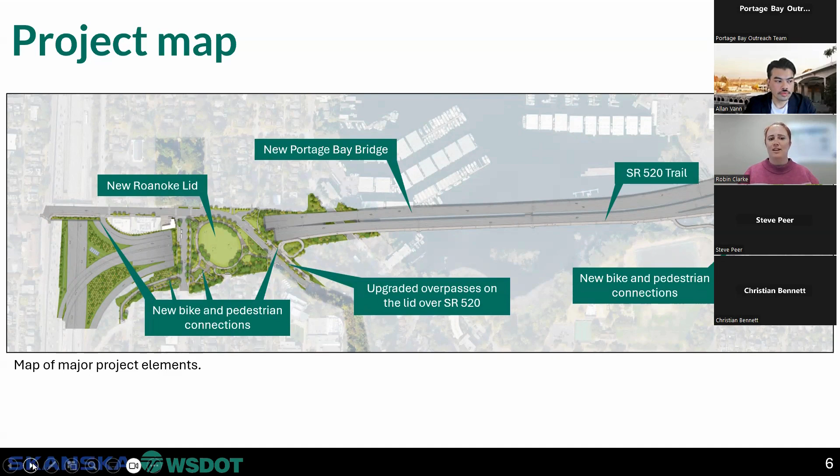So as you can see right here, we've got a little bit of a new graphic just updated for you guys to check out. This is our project map for the Roanoke Lid and the new Portage Bay bridges that will be replacing the existing 520 bridge across the bay. On the south side, we've got our SR 520 trail that's going to connect the Lid to the East Montlake side of the Portage Bay, with new bike and pedestrian connections to the Bill Dawson Trail and some of the local areas on the Roanoke neighborhood side of the project.

In our project schedule, we are still early into the spring of 2025.

Happy solstice, everybody. Earth solstice. Is it solstice or... I don't think it's solstice. It's the first day of spring. Happy first day of spring to everybody. Thank you, Chelsea, I'll get my terms right for the next one, which is summer solstice. Spring equinox is today, thank you again.

We're in the early stages of construction for both our work bridge and getting to our Portage Bay Bridge North overall construction, which will go through 2027. Just like to point out at the bottom that we're getting towards the end of our in-water pile driving season, the first of 5 major seasons we'll be tackling throughout this construction schedule. We'll talk more on those updates in a moment.

Getting into some of our current construction activities, for this month we've been continuing our impact pile driving in Portage Bay. Most of our work has been during daytime hours, including Saturdays and Sundays throughout the week. We've also been removing some select trees and vegetation over near the Bill Dawson Trail and Montlake Boulevard area.

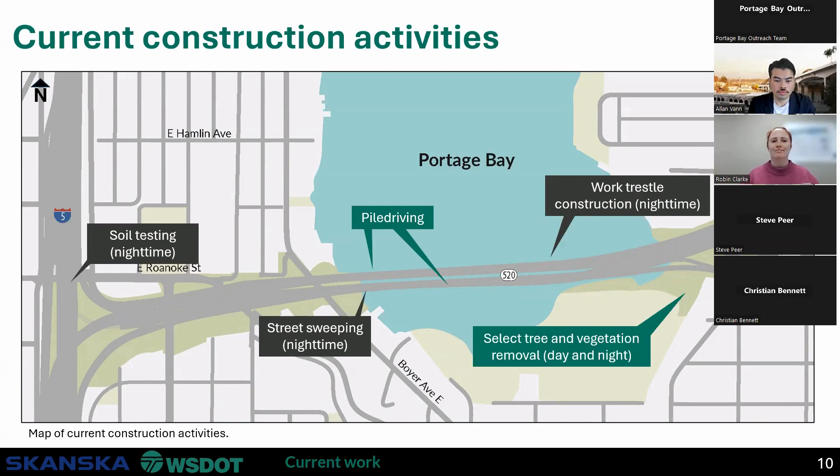And we've had some select tree and vegetation removal for day and night over on the east side.

Getting into a little bit more depth on the pile driving progress for this month, we are again installing our daily goal of between 2 and 8 piles each day. For those of you in and around the area, we have, I think, 4 cranes out there directly working on the work trestle itself.

And we have one working on a similar project adjacent to the work trestle, working just on an extension project of the work trestle itself. The areas in green are part of that progress you guys see. We have, as of today, 171 piles installed for our overall goal of, I believe, 380 thereabouts for this season.

Generally speaking, between impact pile and vibratory pile, getting a little bit past the season, we have crews pile driving 7 days a week through the end of the month, and our impact window ends on April 30th. After April 30th, we'll continue with just vibratory driving.

Again, it ends on April 30th, so May 1st we will be doing strictly vibratory pile driving up until September of this year, this fall. Between May and September, we will still have cranes and barges out on the water working on those work trestles, and they'll be continuing the vibratory pile installation on both sides of SR 520, continuing installation of the temporary work trestle. But again, it'll still be with the vibration hammer to install those piles, so you won't hear any more of the pile driving impacts you're currently experiencing.

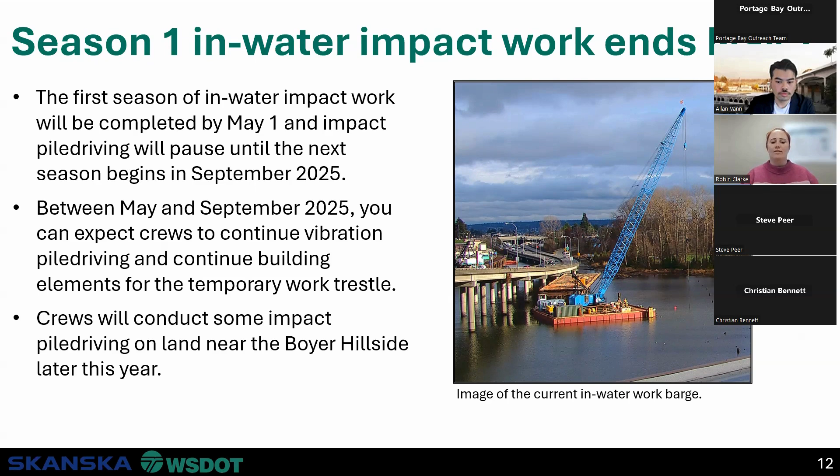Then as we get onto some of the land near Boyer Hillside, we'll resume a little bit of impact pile driving. I don't expect that until later this year, but we'll continue to update you guys as we know more with our schedule and operations.

Just a little bit on the difference between some impact and vibratory pile driving. With impact pile driving, you can see an example there on the right in the photo. It's basically a large hammer that hits the top of a steel pile, sending a very abrupt sound and sharp force onto the pile, which sends it directly into the ground and helps us get the structural capacity we need for the work trestle.

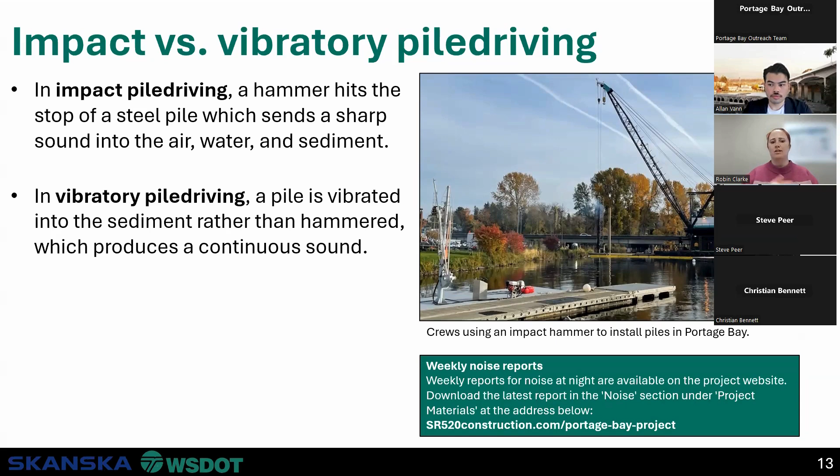One thing we publicized to folks, and you may have gotten a notice on this, is that we looked into some equipment changes for our vibratory equipment. We looked into a test pile operation to change from an APE 200 to an APE 400, a different type of hammer. We've been using the APE 200 for all of our work trestle pile driving for vibration. But this past March 6th, we used a vibratory hammer called an APE 400 to test what capacity we would get with that hammer versus the 200.

The reason for that is when we reach April 30th, past our impact pile driving window, something I'll talk about in a moment, is our future construction on a temporary configuration for the eastbound off-ramp to 520, or Montlake Boulevard, excuse me. We will need a vibratory hammer that has enough force to give us good vibration and force to install these piles for that temporary off-ramp configuration.

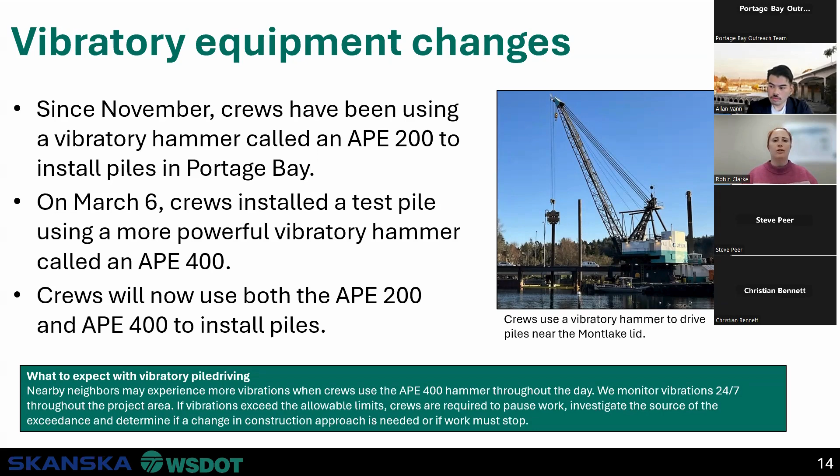We've gotten some different feedback from folks regarding our tests from that past March 6th equipment change, but just wanted to run you folks through what that looks like for the future.

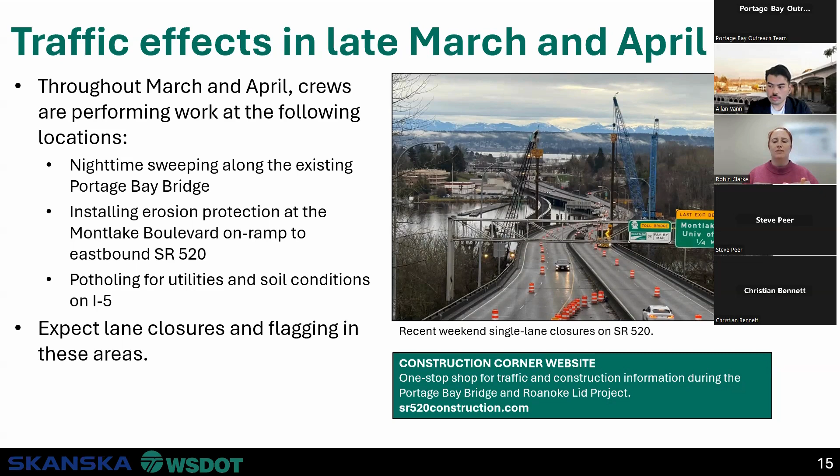Kind of jumping into some traffic effects for late March and April. Throughout this March and coming into April, we have a handful of operations that'll be ongoing. We have our nighttime sweeping along the existing Portage Bay Bridge, which is a mobile operation. We have installation of erosion protection at the Montlake Boulevard on-ramp to eastbound 520. And we have some potholing for utilities and soil conditions on I-5, which will include some lane closures. All of these are either mobile operations, lane closures, or flagging, typically at night, to maintain safety for our own crews and for interface with the public.

Jumping into the tree removal schedule, something I've been talking with our folks quite a bit about and with you guys a lot in our last couple of meetings. We have a tree removal schedule that we continue to target for this late March, which, as you know, we're in late March right now. So we're hoping to start with our larger tree removal here in the next week to two weeks.

We are starting on the Montlake side of our project with those tree removals, and we'll then be moving over to the west side of our project on the Boyer Hill side, and then up onto the East Roanoke Street side after that. This will allow us to clear those work zones for upcoming work, and then work through that with our construction activities.

Focusing on the Montlake side, since that's where we'll be starting with our operations, we have crews that have started with some smaller shrub and vegetation removals near the Bill Dawson Trail in order to clear some select areas for erosion control measure installation. They'll continue that as we get into the larger tree removals in the next week to two weeks.

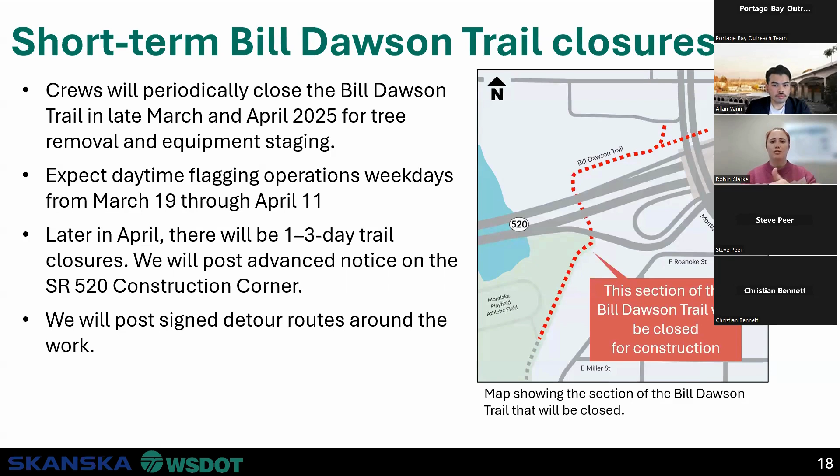Last but not least, acoustic fence installation. This one's been following some of our construction activities. We're currently looking at an April target for our acoustic fence installation for most of our project locations, starting again on the east side and working our way west across the project. A lot of this is contingent upon when we get to points with our work bridges and construction activities, so we can install that just ahead of when those activities begin.

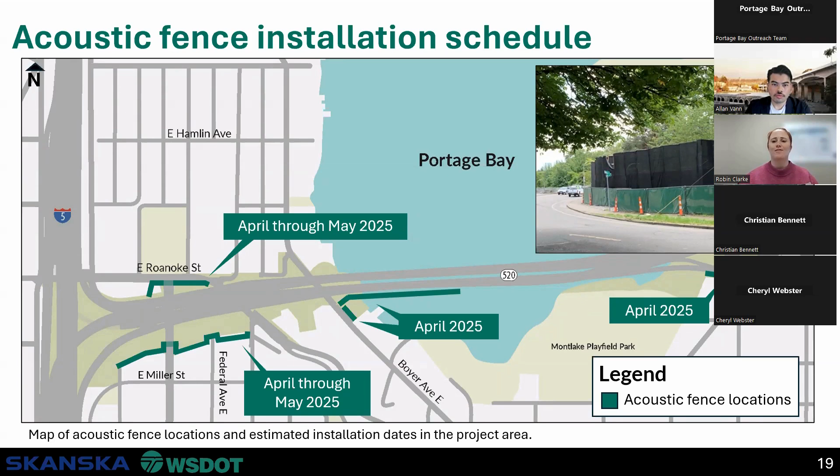There's a picture of what the acoustic fence will look like once it's installed - it's actually the fence in black, just to clarify. The green fence is more of a security fence for site operations.

All right, jumping to ongoing nighttime work to get a little more detail. For March nighttime construction, we've been doing some sweeping on the existing Portage Bay Bridge for site maintenance, had ongoing lane closures for the 520 on-ramps for our erosion control measures and to get ready for tree removals, and some lane closures for continuing to build out the temporary work trestle platforms.

We've had some night work to continue building out the temporary trestle platforms. Our nighttime work is Monday through Friday, 10 to 7, and we do have nighttime work on weekends, 10 p.m. to 9 a.m. We do not do any impact pile installation or vibratory pile installation at night so that we don't exceed our nighttime noise allowances - we're strictly working on basic equipment and material lifting, placement, and installation for those decks and platforms.

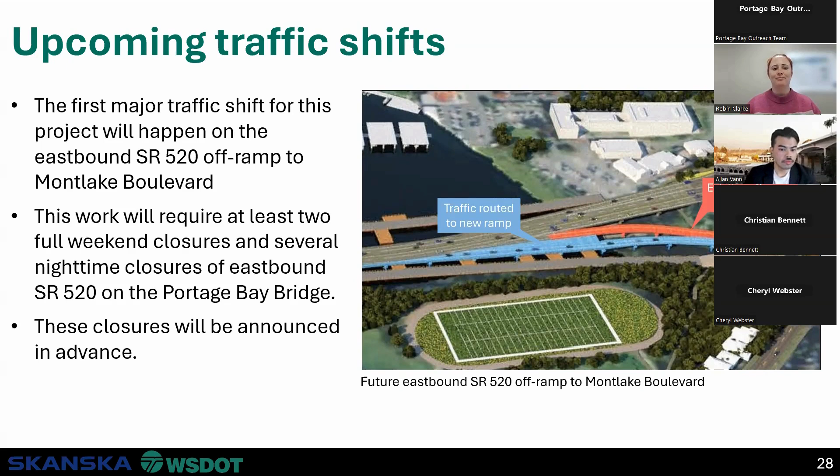Long-term look ahead for 2025, the last thing I'll touch on today. Just some high-level look ahead throughout the year. We'll again have our impact pile driving seasons. Season 1 wraps up April 30th, and we'll begin Season 2 on September 1st. We'll continue vibratory pile driving throughout the year, and we'll have some traffic impacts throughout the year as well.

We'll give you as much notice as we can, and all of it will go through our typical construction corner, email updates, etc. Please stay in touch with us through all our social media channels. We'll have utility work in the Roanoke area near Boyer Avenue, and we'll begin construction of the temporary bridge and off-ramp on the east side of the project.

And with that, I will turn it back over to Allan.

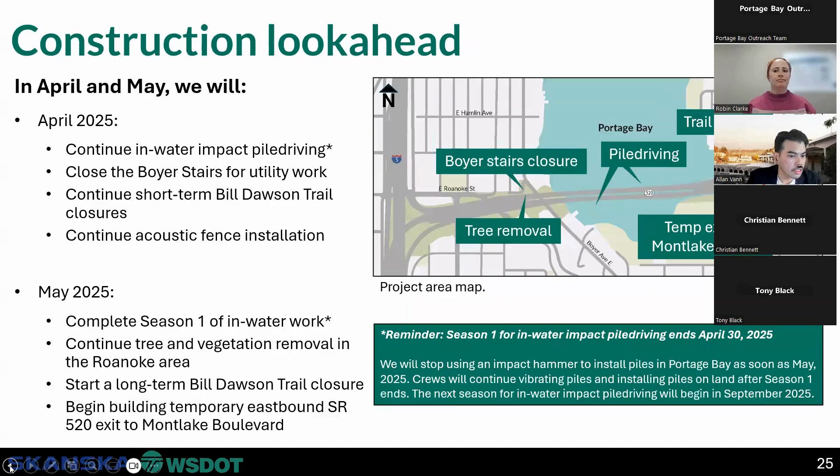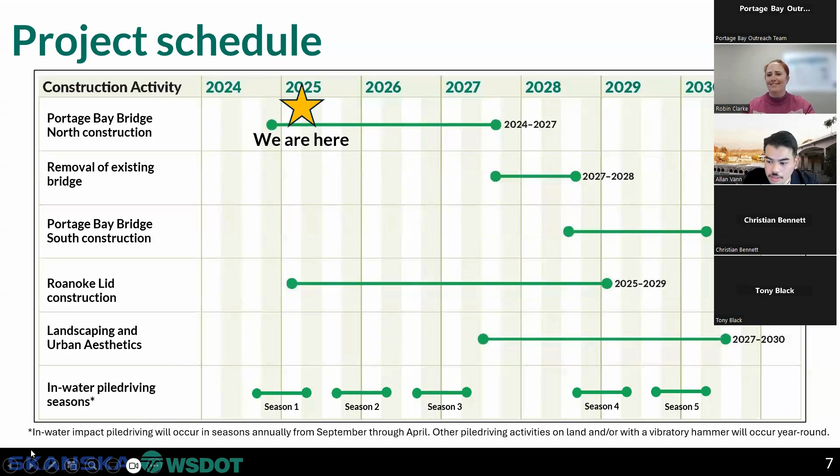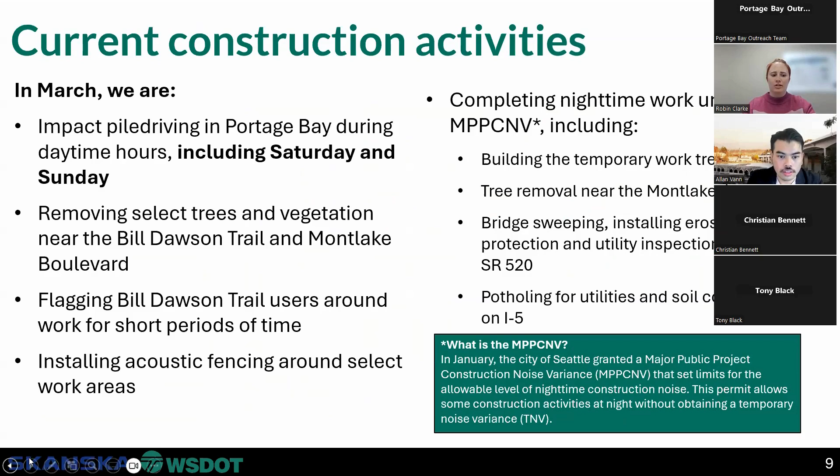Carl asked: what is the timing for building the walls along Boyer Avenue East? We are starting our utility work here this year. That will sequentially roll into our ability to work on those walls along Boyer once we get the 26 kV overhead line relocated, which then allows us to work on those walls. So we're looking at very late this year or early next year to start on that wall installation.

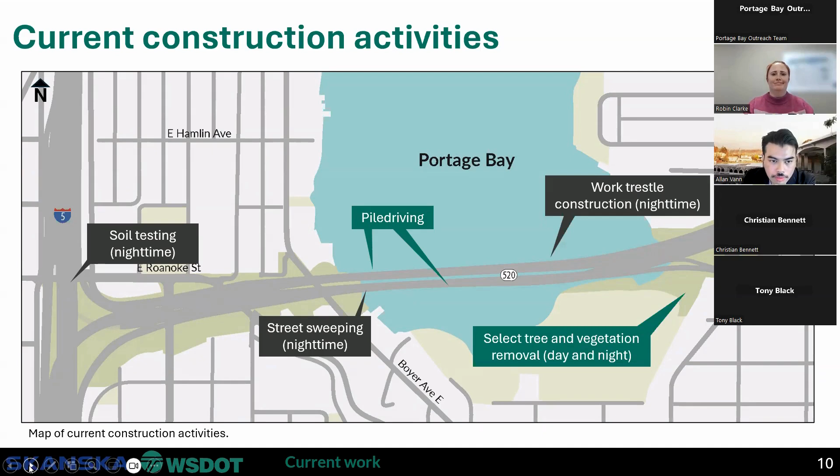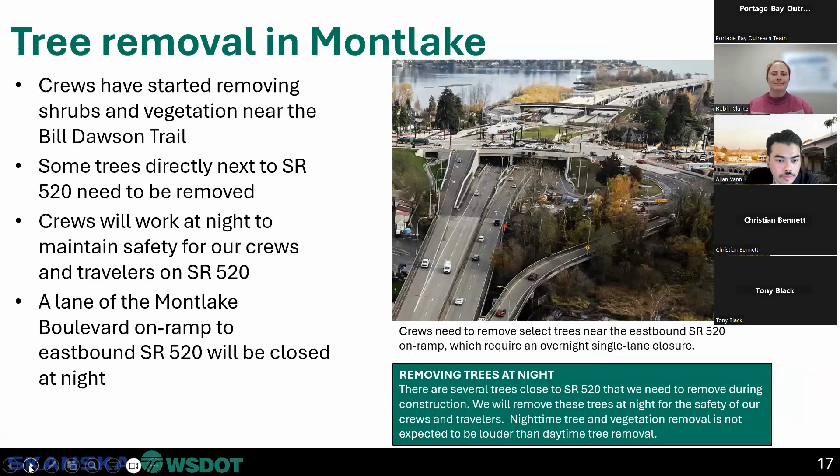As we make progress on construction in that area, the best way to stay informed of updates is to continue attending these monthly update meetings. We'll also be hosting several open houses this summer, with more details shared via our project email list as we get closer.